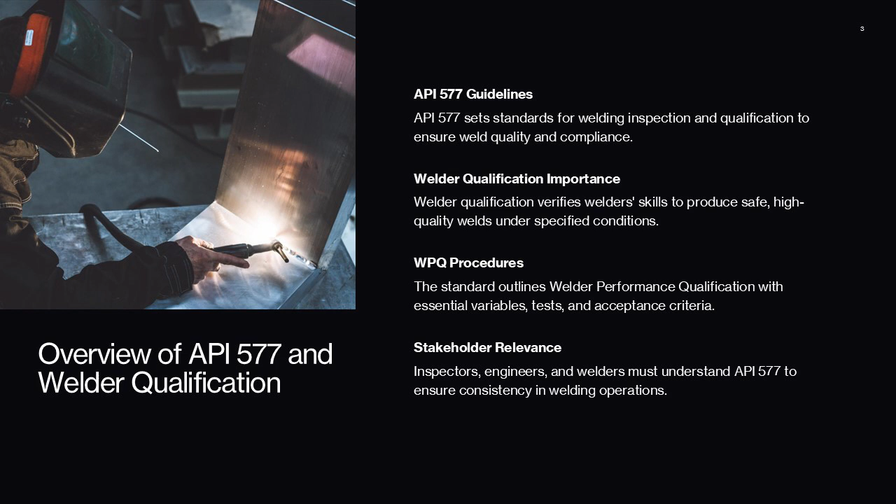Welder qualification is a critical process that verifies a welder's ability to produce sound welds under specified conditions. This qualification ensures that welders possess the necessary skills and knowledge to meet safety and quality requirements in construction and maintenance projects. The standard outlines procedures for welder performance qualification or WPQ, including essential variables, testing methods, and acceptance criteria. Understanding these guidelines is vital for inspectors, engineers, and welders to maintain consistency and reliability in welding operations.

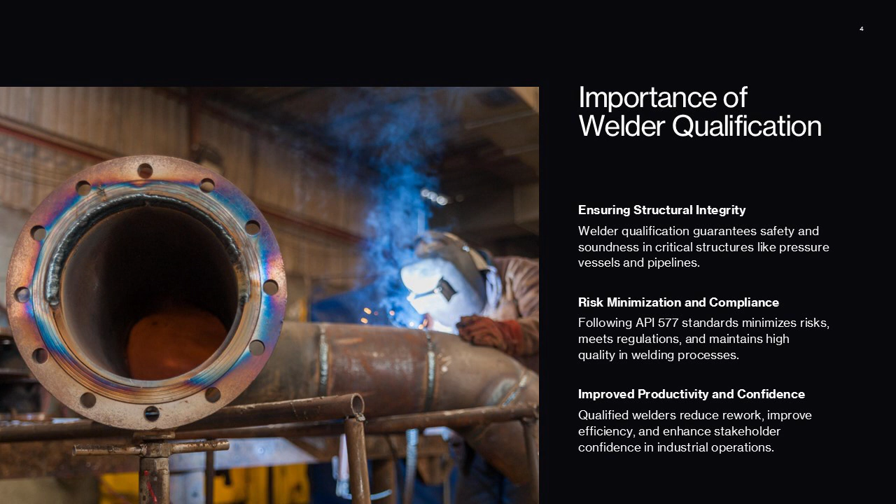Welder qualification is essential for ensuring structural integrity and safety in pressure vessels, pipelines, and other critical components. Improper welding can lead to catastrophic failures, financial losses, and safety hazards. By qualifying welders according to API 577, organizations can minimize risks, comply with regulatory requirements, and maintain high-quality standards. It also helps in reducing rework, improving productivity, and ensuring that welders are competent in handling specific materials, positions, and welding processes. This process builds confidence among stakeholders and supports the overall reliability of industrial operations.

Next, we'll dive into WPQ, Welder Performance Qualification. This process certifies a welder's ability to produce acceptable welds under defined conditions. Welder Performance Qualification or WPQ is a documented process that certifies a welder's ability to produce acceptable welds under specific conditions. The objective is to confirm that the welder can consistently meet the mechanical and visual requirements of a given welding procedure.

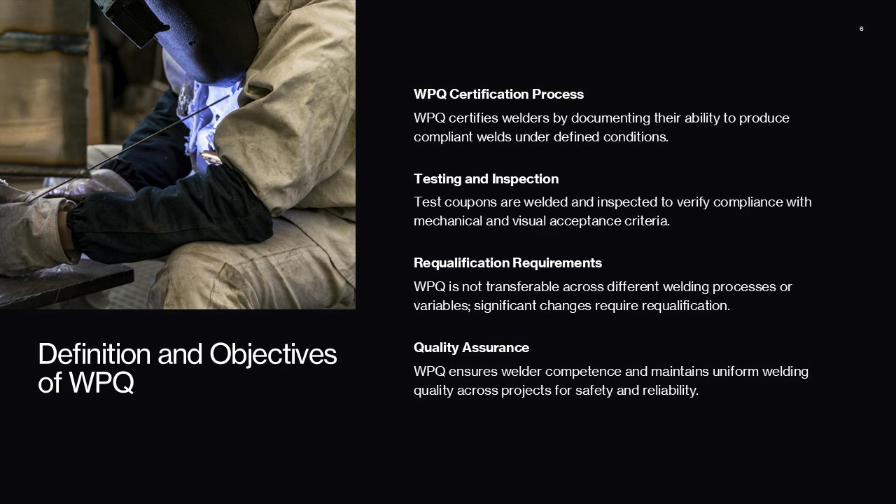WPQ involves welding a test coupon under controlled conditions, followed by inspection and testing to verify compliance with acceptance criteria. This qualification is not transferable across different welding processes or essential variables, meaning any significant change requires requalification. WPQ ensures that welders are competent for the intended scope of work and helps maintain uniform quality across projects.

Essential variables are factors that, when changed, can affect the welder's ability to produce acceptable welds. API 577 specifies these variables, which include welding process, base material type, filler metal classification, welding position, joint design, and thickness range. For example, a welder qualified for carbon steel in a flat position may not be qualified for stainless steel or overhead positions without requalification. Understanding and controlling these variables is crucial for maintaining compliance and ensuring weld quality. Inspectors must verify that the WPQ documentation accurately reflects these variables to avoid misapplication in production welding.

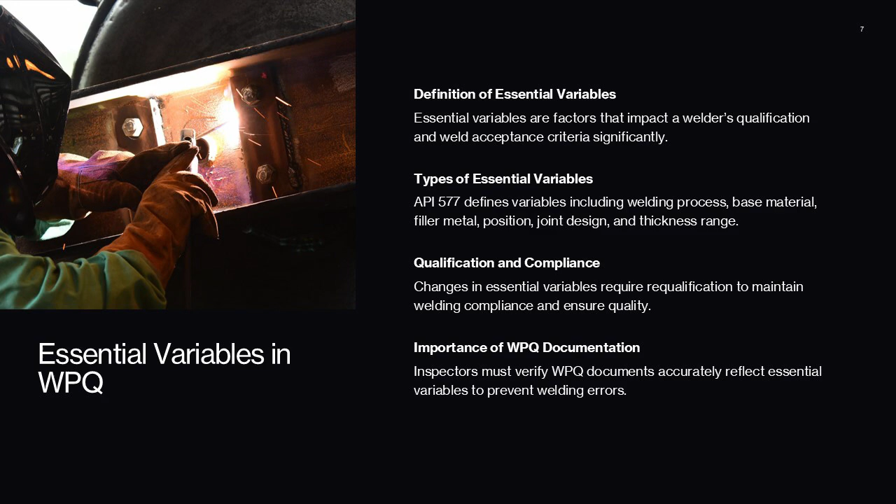Now, let's look at the WPQ process and testing methods. This includes steps from WPS selection to inspection and documentation. The WPQ process begins with selecting the appropriate welding procedure specification or WPS and preparing a test coupon that meets the required dimensions and joint design. The welder performs welding under supervision, ensuring adherence to the WPS.

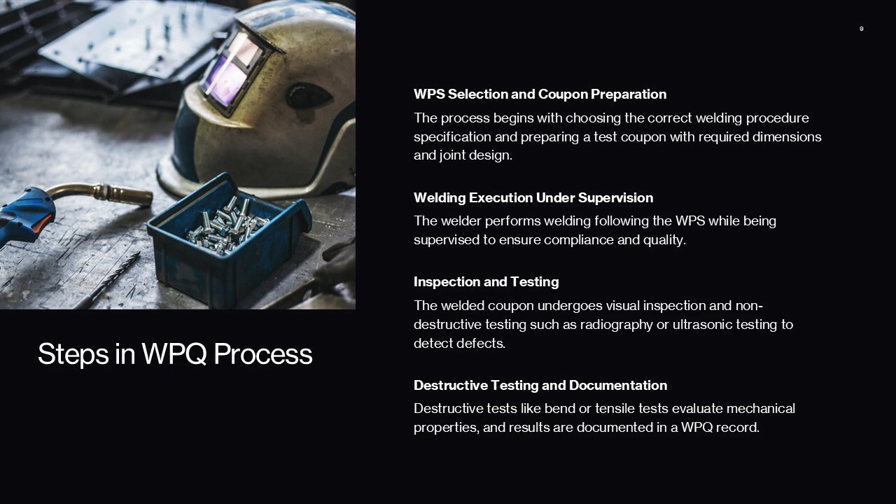After welding, the coupon undergoes visual inspection for surface defects, followed by non-destructive testing or NDT such as radiography or ultrasonic testing to detect internal flaws. Destructive tests like bend tests or tensile tests may also be conducted to evaluate mechanical properties. The results are documented in a WPQ record, which includes welder identification, test details, and acceptance criteria compliance.

Testing methods for WPQ include visual inspection, NDT, and destructive tests. Visual inspection checks for surface defects such as cracks, porosity, and undercut. NDT methods like radiographic testing or RT and ultrasonic testing or UT detect internal discontinuities without damaging the weld. Destructive tests, including bend and tensile tests, assess the weld's mechanical strength and ductility.

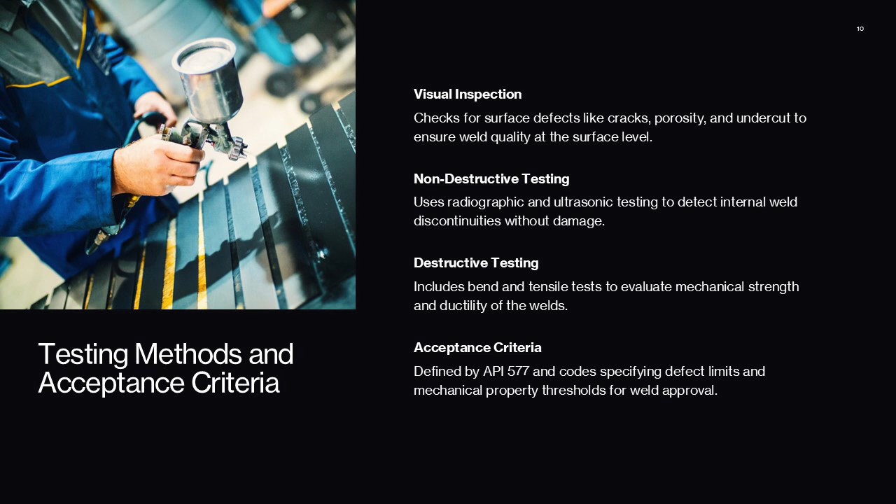Acceptance criteria are defined by API 577 and related codes, specifying allowable defect sizes and mechanical property thresholds. Compliance with these criteria confirms the welder's capability to produce sound welds under specified conditions. Reviewing WPQ documentation is critical. Inspectors must verify essential variables, confirm test results, and ensure documentation completeness for compliance.

Reviewing a WPQ involves verifying that all essential variables and test results meet the specified requirements. Inspectors should check welder identification, WPS reference, welding process, base material, filler metal, position, and thickness range. The review must confirm that the test coupon passed visual, NDT, and destructive tests as applicable.

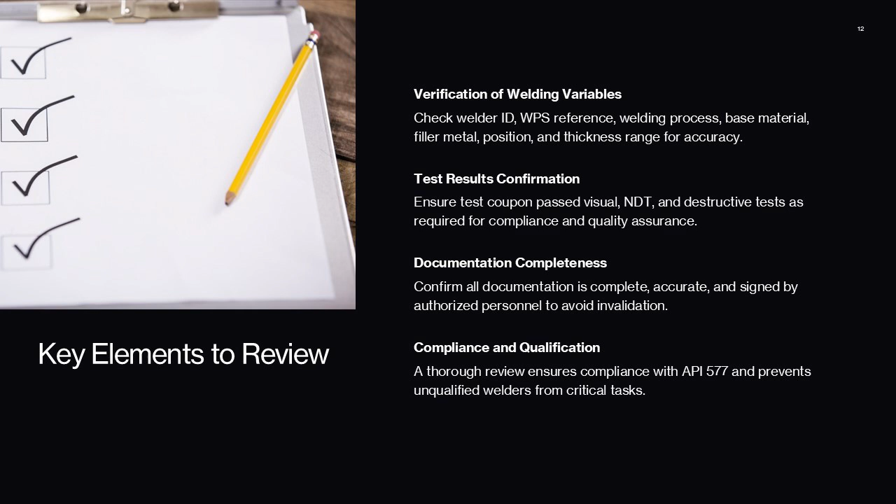Documentation should be complete, accurate, and signed by authorized personnel. Any discrepancies or missing information can invalidate the qualification. A thorough review ensures compliance with API 577 and prevents unqualified welders from performing critical work. Common errors in WPQ review include overlooking essential variables, accepting incomplete documentation, and failing to verify test results. These mistakes can lead to non-compliance and compromised weld quality.

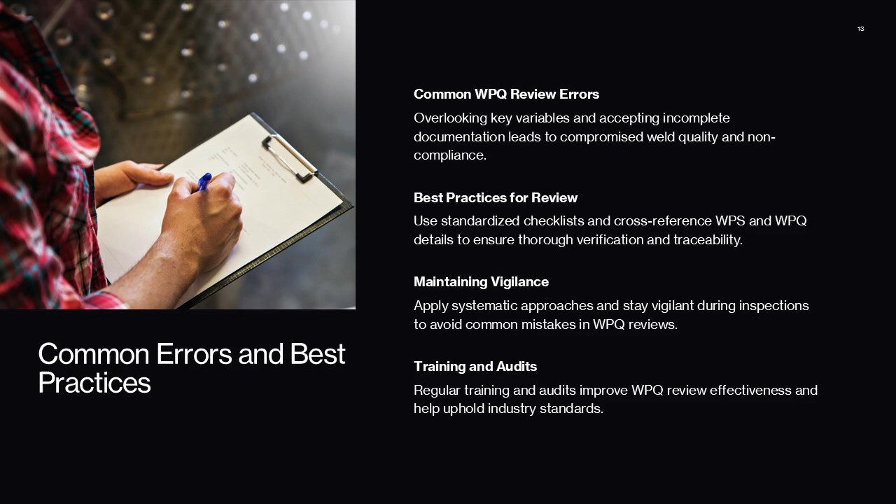Best practices include using a standardized checklist, cross-referencing WPS and WPQ details, and ensuring traceability of records. Inspectors should maintain vigilance and apply a systematic approach to avoid errors. Regular training and audits can further enhance the effectiveness of WPQ reviews and uphold industry standards. Proper documentation ensures traceability and compliance. Records should include welder details, WPS references, test results, and signatures.

Proper documentation of WPQ is essential for traceability and compliance. Records should include welder details, WPS reference, test results, and signatures of authorized personnel. These documents serve as evidence of qualification and are often required during audits or inspections. Maintaining organized and accessible records helps ensure accountability and facilitates quick verification when needed. Digital record-keeping systems can improve efficiency and reduce the risk of lost or damaged documents.

Compliance with API 577 requires adherence to its guidelines for welder qualification, testing, and documentation. Organizations should implement robust quality control systems, conduct regular audits, and provide training to personnel involved in welding inspection. Compliance not only ensures safety and reliability but also enhances reputation and reduces liability. By following API 577, companies can demonstrate commitment to industry standards and maintain operational excellence.

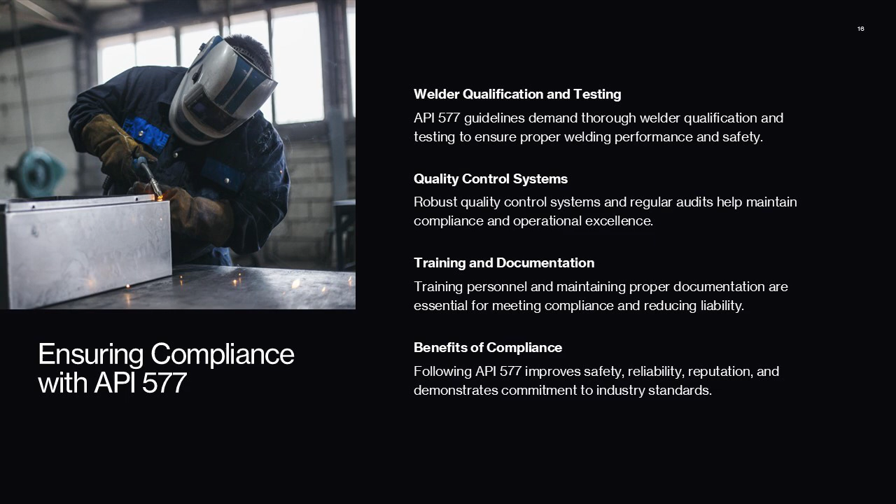WPQ verifies welder competency and ensures quality welds. Reviewing documentation prevents errors and maintains compliance. Adhering to API 577 supports project integrity. Welder Performance Qualification or WPQ is a critical process that ensures welders are competent to produce quality welds under specified conditions. Reviewing WPQ documentation is equally important to verify compliance and prevent errors.

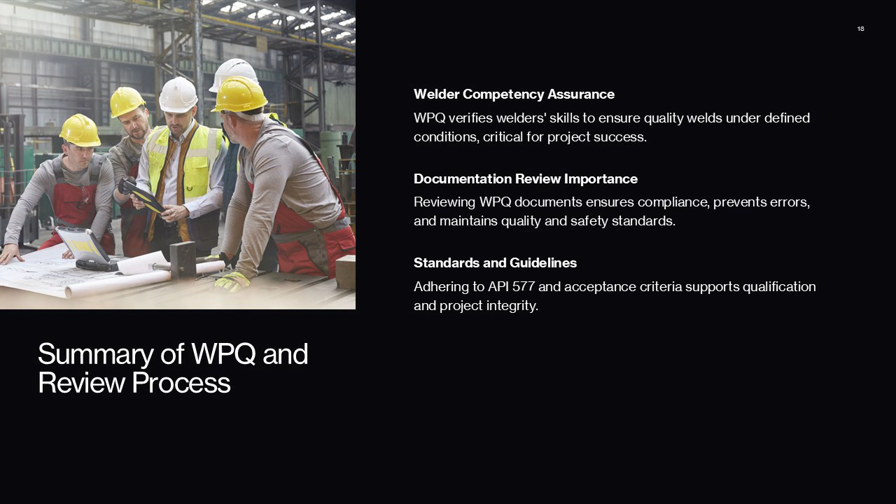By understanding essential variables, testing methods, and acceptance criteria, inspectors and engineers can uphold industry standards and maintain safety. Proper documentation and adherence to API 577 guidelines are key to successful welder qualification and overall project integrity. Organizations should prioritize welder qualification and WPQ review as part of their quality assurance programs.

Implementing best practices, such as standardized checklists, thorough documentation, and regular training, can significantly reduce risks and improve outcomes. By fostering a culture of compliance and continuous improvement, companies can ensure safe, reliable, and efficient welding operations that meet or exceed industry standards.